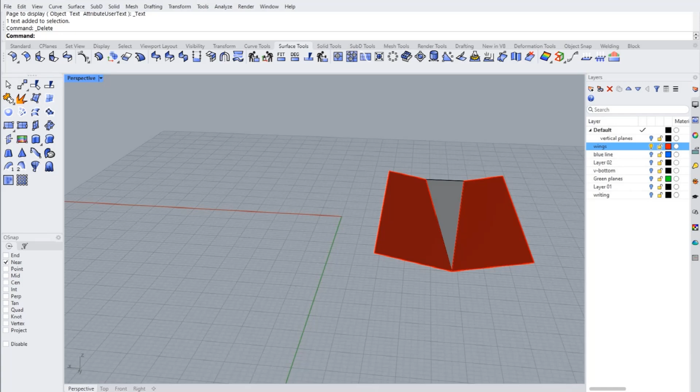So I decided to make a quick video about alignment of a delta pad bottom boat into a V bottom jig like this. The question is, if I set this delta pad bottom into this V, will it line up nicely? For example, will this side line up with this side while this side lines up with that side, or will something else strange happen?

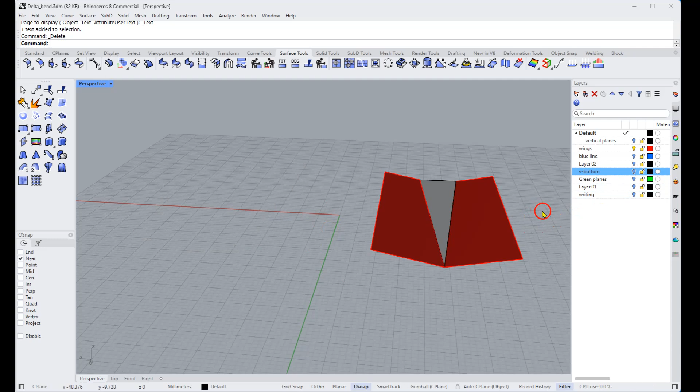And it turns out it will line up smooth, flush on both sides, but not exactly in the way that you would expect. So let's zoom out and look at this from a little bit different perspective. So here's the delta pad viewed from a different perspective. These green planes are the bent sides of the delta pad, but they're extended, as you can see here.

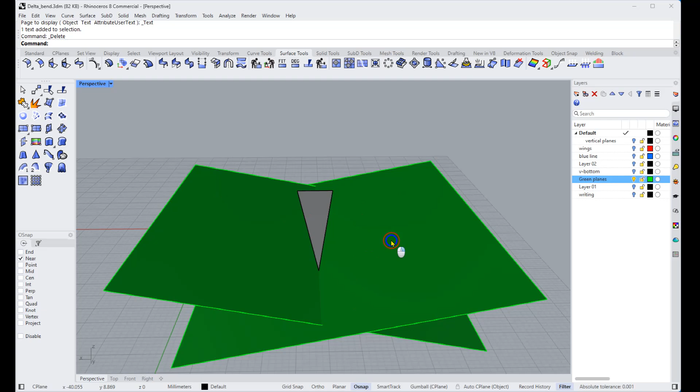So here's one bend and the plane that it makes, and another bend and the plane that it makes. And these planes are symmetric, just like a V bottom is, but that line that they're symmetric about is not what you would first think. So this blue line shows their line of symmetry.

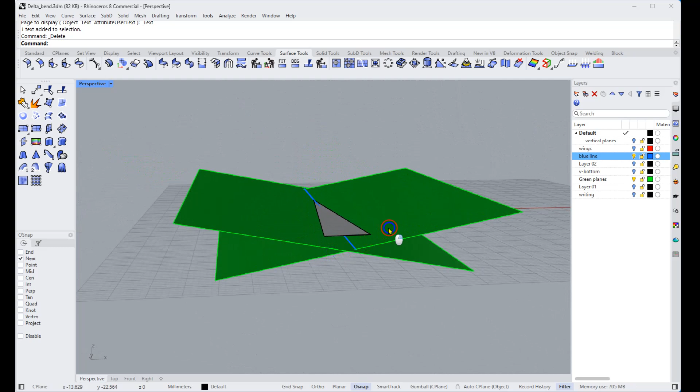And as you can see, the blue line actually goes below the delta pad at the back, and then at the front you can see, well, here it meets the tip of the delta pad, and then it keeps going up in front of that. So what's implied is that when you set this delta pad into a V bottom jig, the delta pad bottom boat will tip downward in the front. So the delta pad will no longer be horizontal.

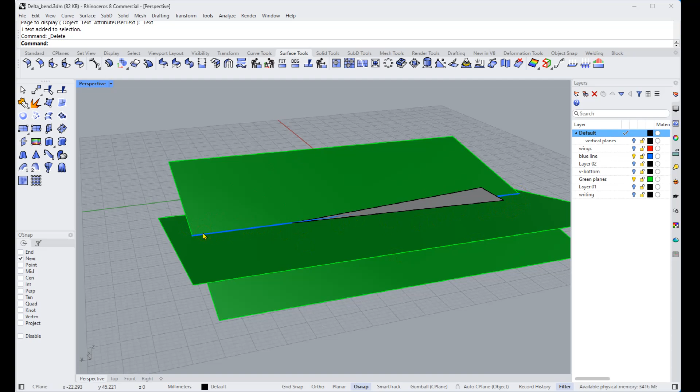It will tip down until this line of symmetry here is the same as the line of symmetry in the jig. So here we're looking at the blue line again from the side, and I've gotten rid of everything else, and it turns out it's sloped downward at about 1/4 of an inch per foot. So if you have a 12-foot delta pad, then you have to slope the front down by 2.8 inches relative to the back, and then the delta pad bottom will fit nicely into a V bottom jig.

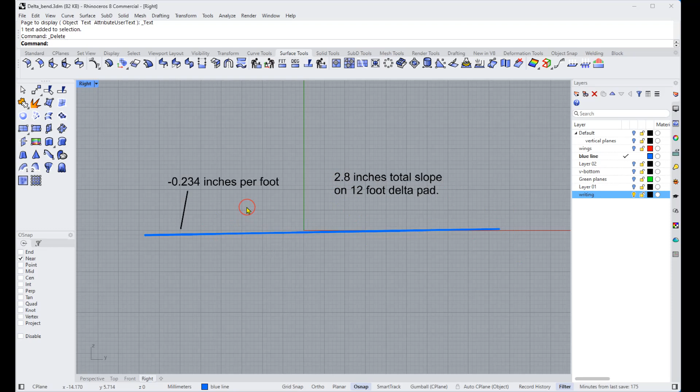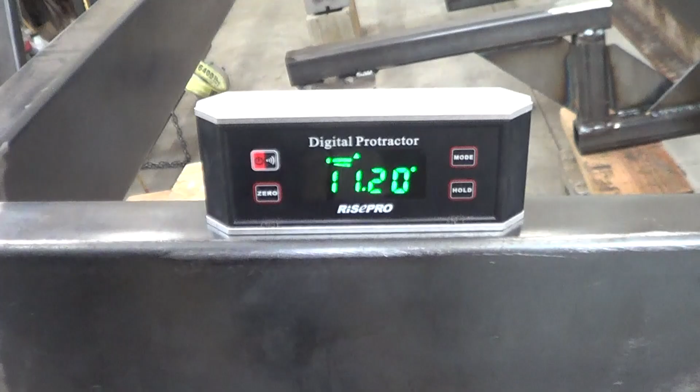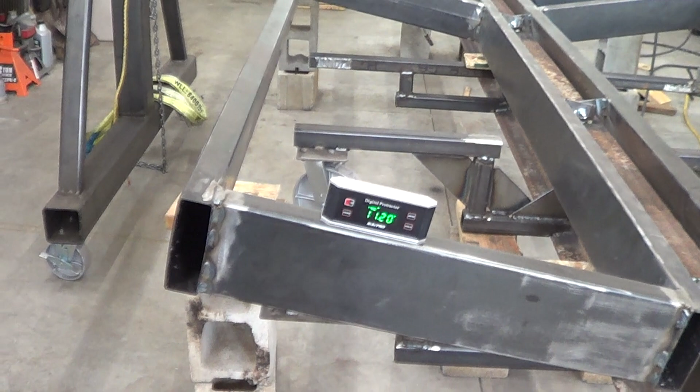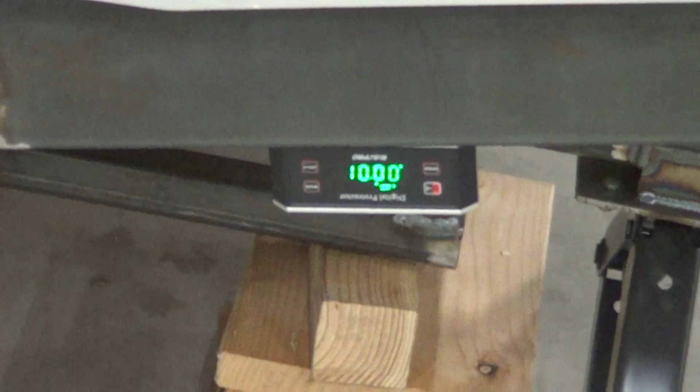Here's another handy tool, this digital protractor. So you can see it's saying 11.2 degrees. So that's the tilt on this thing right now. And that's really handy when squaring everything up and making sure everything is level and true and square and straight and all that kind of stuff when you're putting this thing together. Another thing about this inclination gauge that's very handy is it's magnetic. So you can hang it from underneath things.